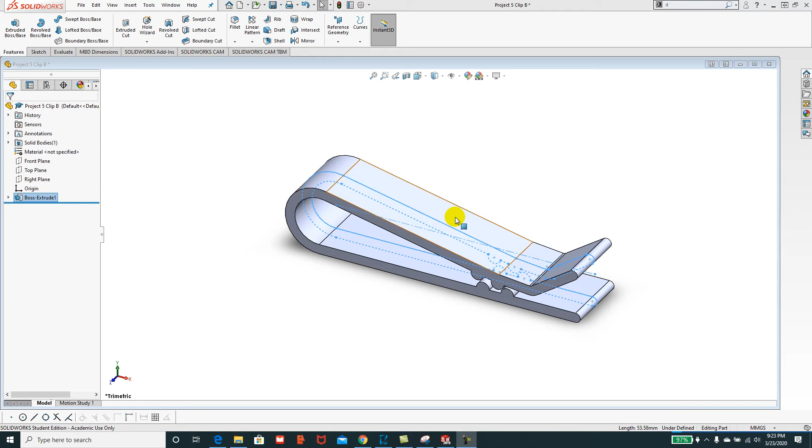Hi, Joe Cerrone here. We're going to take a look at creating a part model of this chip clip for the Introduction to 3D Printing course. This project was taken from the textbook.

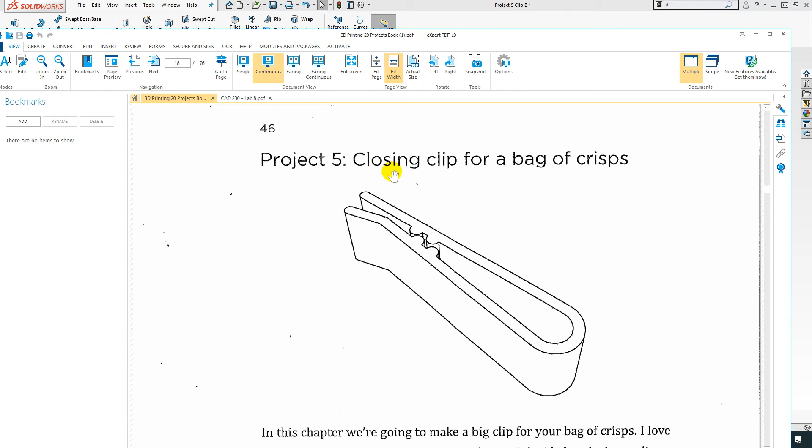It's a project closing clip for a bag of crisps. I thought this would be a good video to start with, since we could model it and submit it to the Dropbox. With the current closure of the school, we should be able to submit it and print them for you.

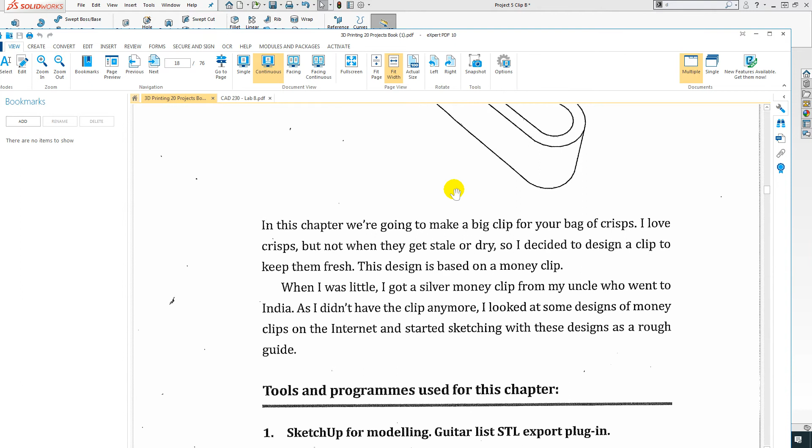So essentially we're modeling to these dimensions, and we're going to use PLA. I'm going to do this in Solidworks, and then I'll do it again with AutoCAD.

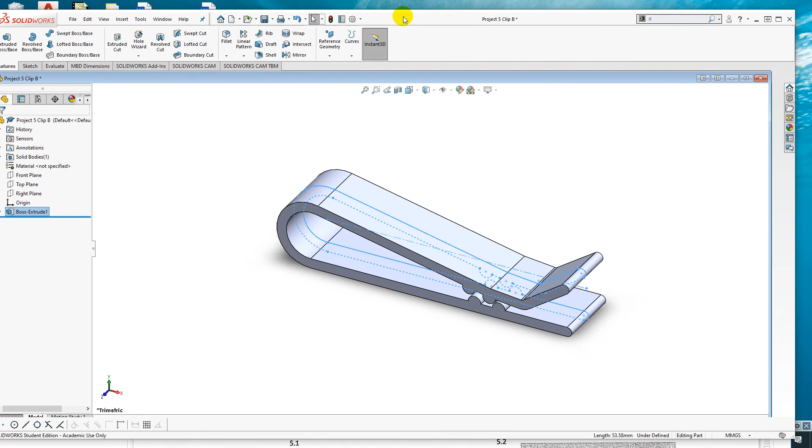Alright, so here's what the finished part looks like, and I'm going to start a new one, file new.

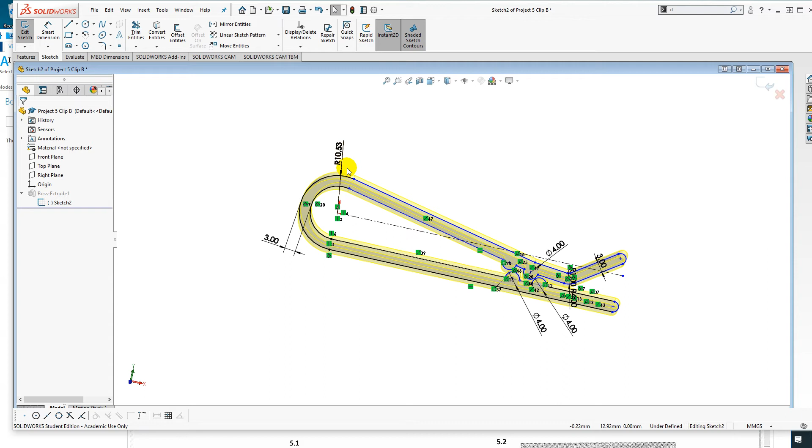Before I do, let's take a look at how I did this. It was really just one sketch, and here's the sketch. If I edit it, you can see it's just the shape on the front plane, about the origin here. Didn't even fully define everything. As I looked at the dimensions, I tried to make them per print from the book, and I had to adjust them a little bit just to make this work, which for a chip clip, I think that's probably quite normal. I extruded this mid-plane, and these are tangent relationships with these lines and the arcs.

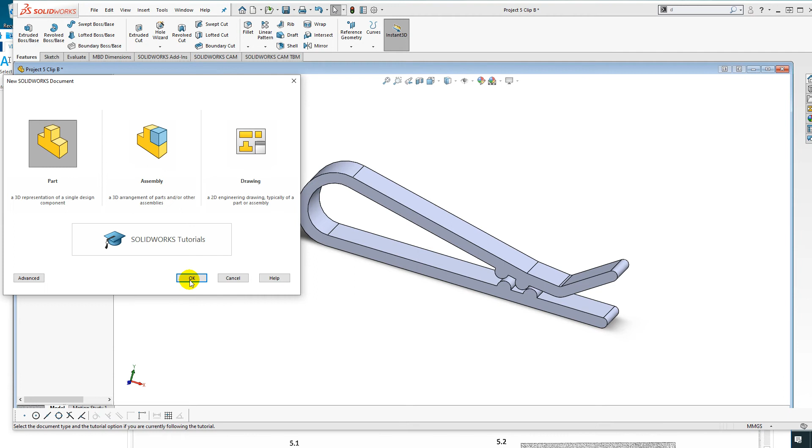Okay, so that's what we're going to model here. We're going to start off with a new part, plain white, units millimeters, front plane, right click, start a sketch.

If we look at the dimensions on the print, it's about 79 millimeters by 20 millimeters. So on the front plane, I'm going to sketch out a line about 80 millimeters, and then at that point I'll draw a circle about 8 to 10 millimeters.

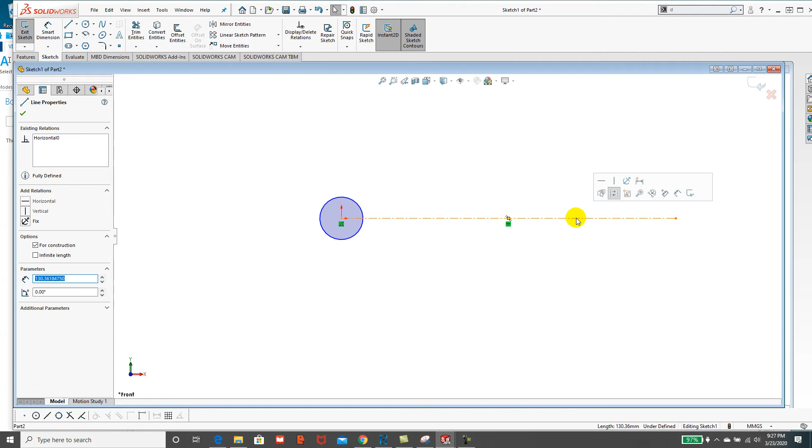So if we make this 16, we're pretty close. And that would be the exterior for this bend.

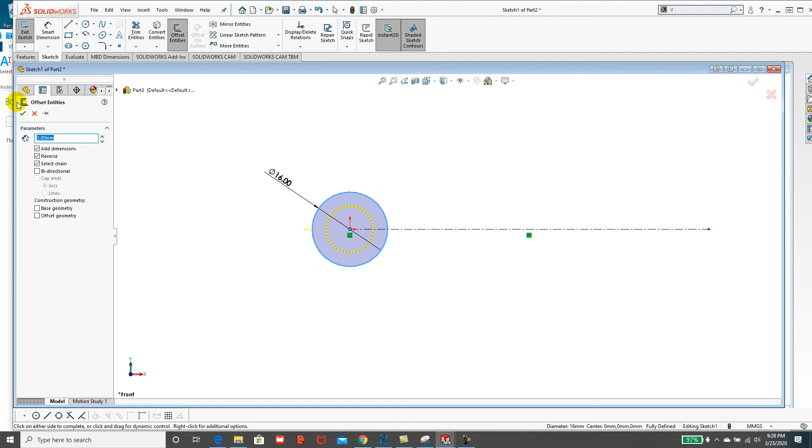And then we can offset that arc 3 units, 3 millimeters, and then start to put in the rest of these shapes. Offset 3, reverse it, check mark it, and then we have a line that comes off this quadrant, goes about 79, 80. Just go here. And then we'll offset that 3.

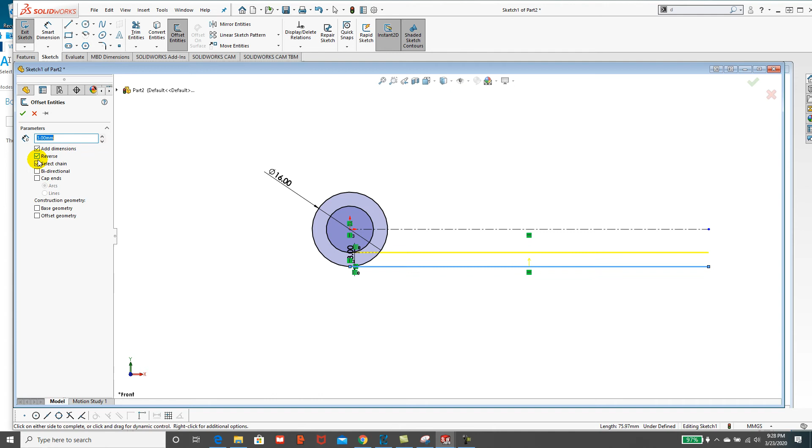Let's make these tangent. That's not... it already thinks they are.

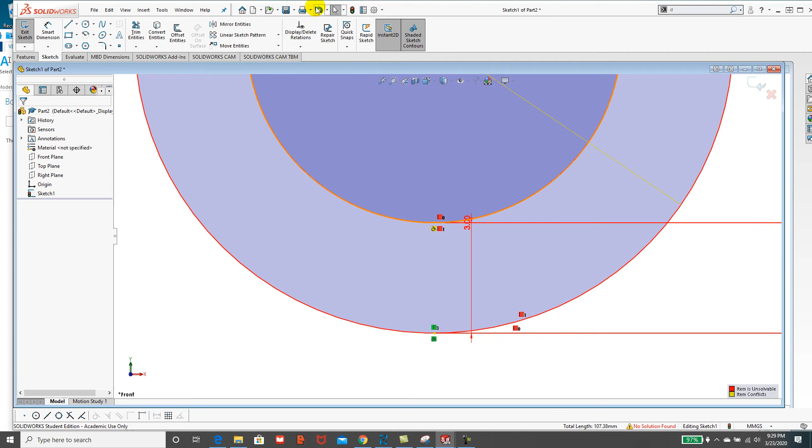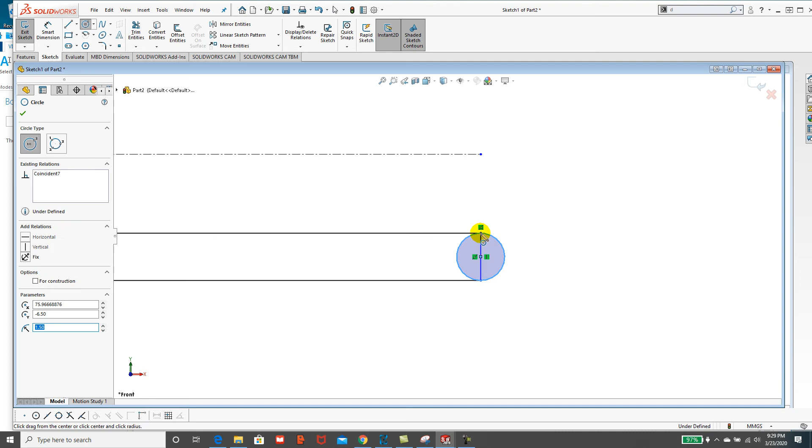Put a little cap on the end here. Wake up the midpoint. Trim. As we look at the shape of it, it's about halfway and then about another third.

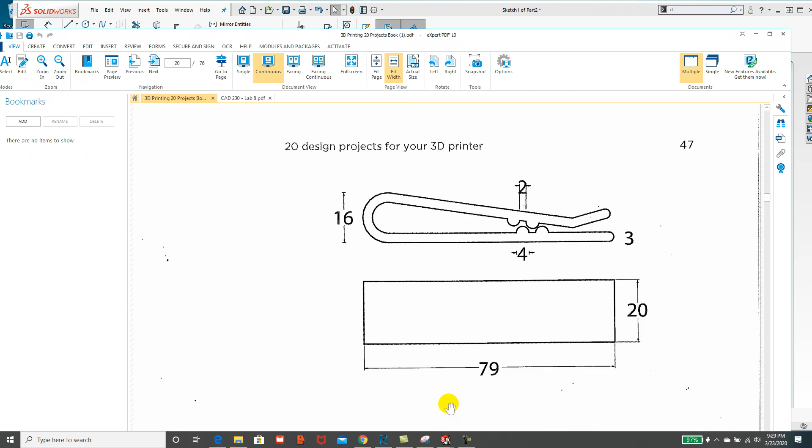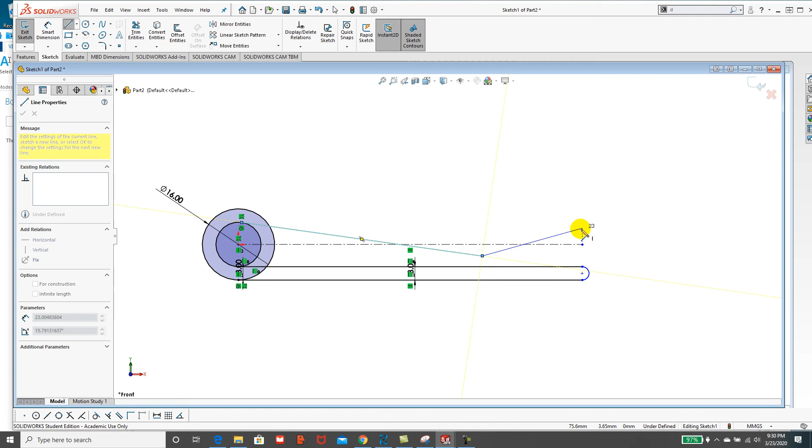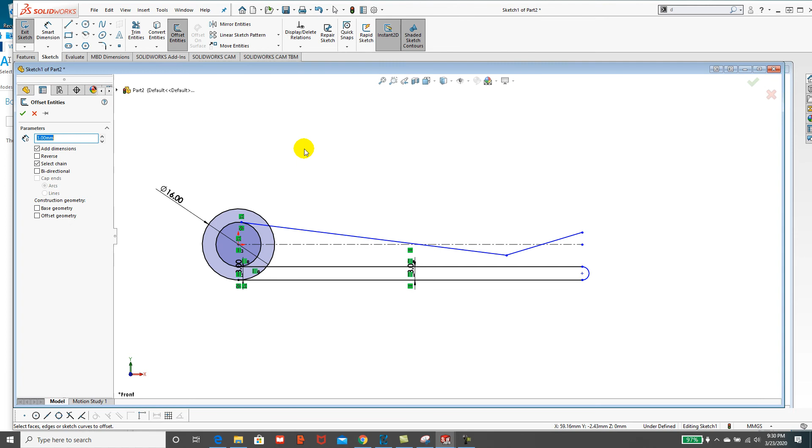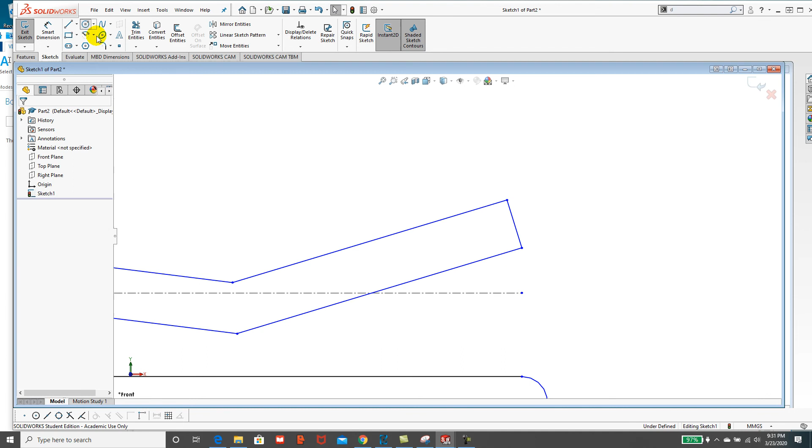So we'll draw a line. And I think, yeah, we'll go like this. And we'll offset this, and we'll cap the end of that. And trim.

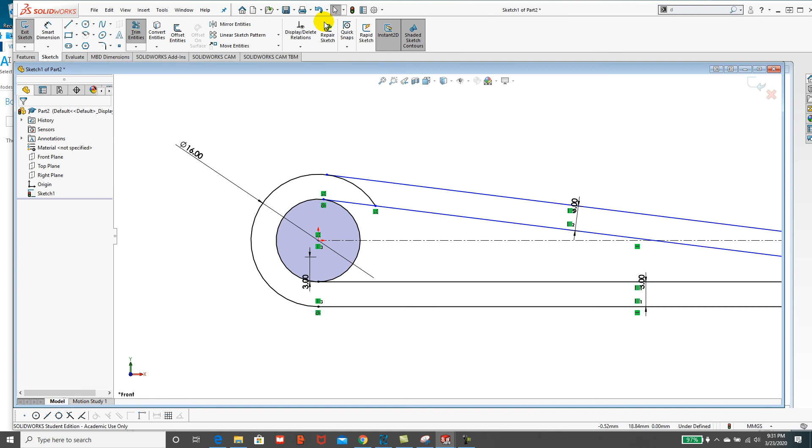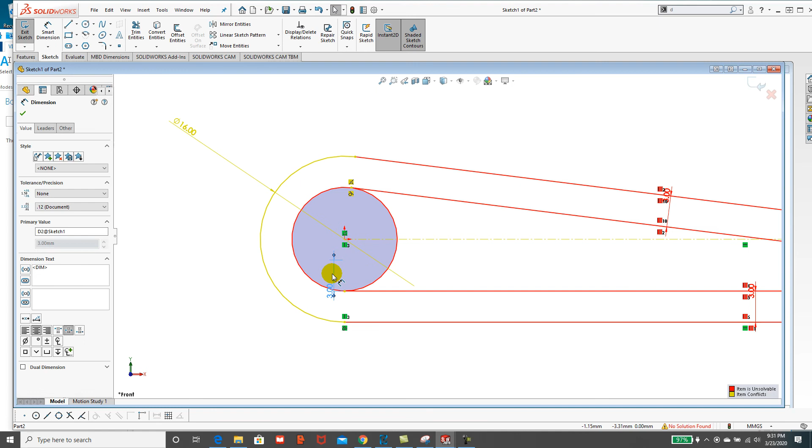All right, let's put those. Well, let's finish this trimming first since we're here. I'm not sure why that happened here. Let's delete some things out and see what happens. There we go, that kind of took care of everything.

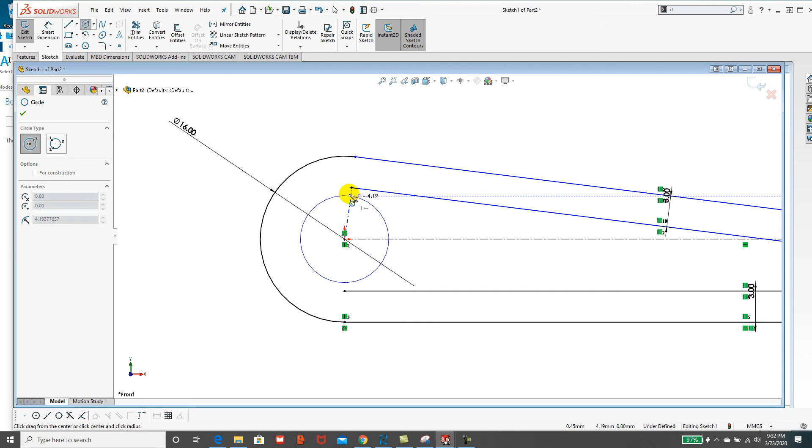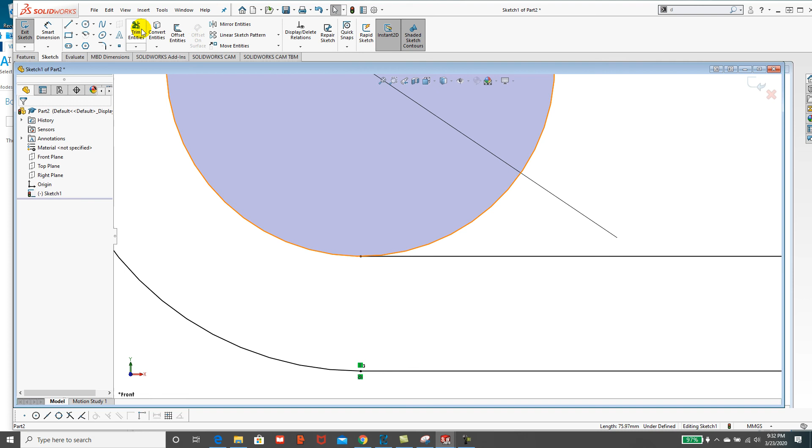We'll put another circle in, like that. Not sure if those are touching. Let's see what happens when we trim them. That's good, yep, good, good, good. That's what we want. All right.

Okay, and then if we look at the exercise, we've got these little ridges, kind of speed bumps, and they're about 4 millimeter diameter. So we'll place those on here. Let's do the bottom ones first.

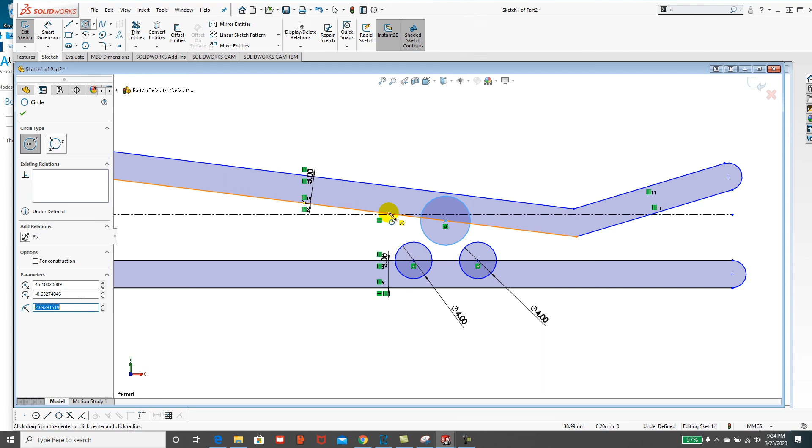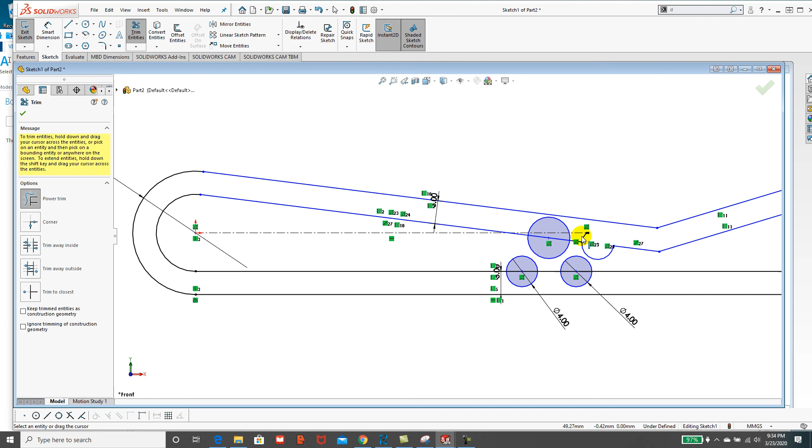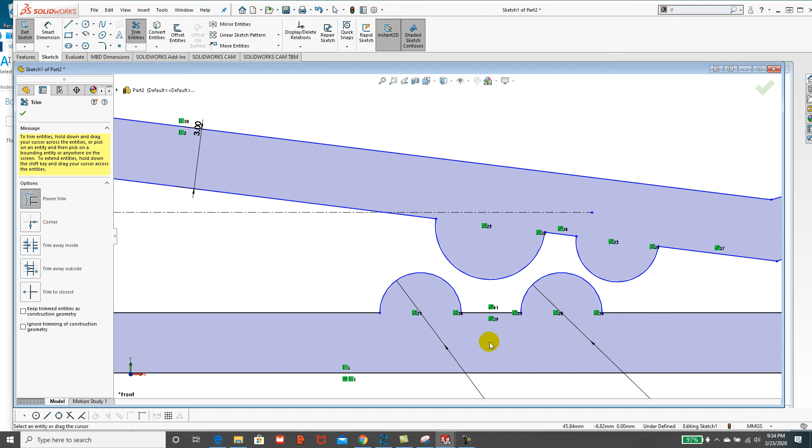I'm going to just do this like that. I'm going to be a little bit creative here, and I'm not going to fully define those. I'm going to trim. Shape out, come on. And we'll do the same over here. All right, so that's my profile for my chip clip.

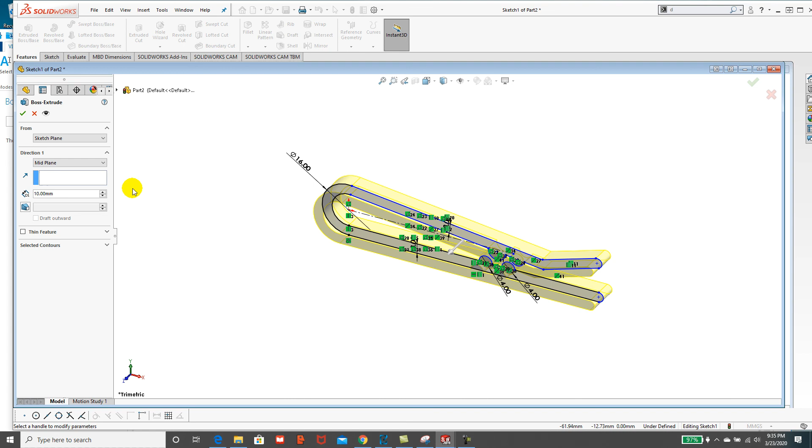And then what I'm going to do is go to Features, Extrude Boss Base, and then extrude that mid-plane. We're going to take that out, let's take a look at that, 20 millimeters. So we'll dial that in, 20. Green check mark, and we'll save this.

And we'll save it as our initials, dash, I think it calls them Project 5. This is CAD 107. We'll save it as a Solidworks part, and then in the next video, we'll export it as an STL. And that completes this video.